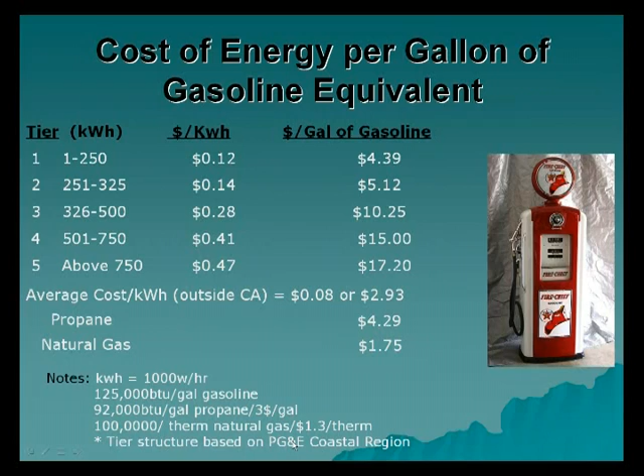Again, this tier structure is based on the PG&E coastal region, and these prices were published in the Chronicle on Sunday. Okay, so just briefly, we'll touch on reduction.

With the foam insulations and the insulation verifications we're seeing, and the fact the Energy Code requires more insulation, we're seeing a lot less heat loss and heat gain due to conduction through your walls, floors, and ceiling. The new window products are just amazing. The Energy Star windows, which most manufacturers now offer at no additional cost, have a U value of 0.3 and an SHGC of 0.3. So those numbers are just about twice as good as what you would probably buy even 7, 8 years ago. The numbers are just outstanding.

Also, starting in 2010, we now have a requirement in California to have fresh air. The thought is the homes have gotten so tight that in order to provide proper indoor air quality, we now have to have either air-to-air heat exchangers or some way to bring fresh air in. And this is something that's now required.

This device here in the upper left-hand corner is an air-to-air heat exchanger. It takes the warm indoor air, blows it through a heat exchanger, and then takes fresh outdoor air, which is cooler, at least in the wintertime, blows it over the heat exchanger and then into the house. So you not only get a supply of fresh air to ensure proper indoor air quality, but it doesn't have to be conditioned as much.

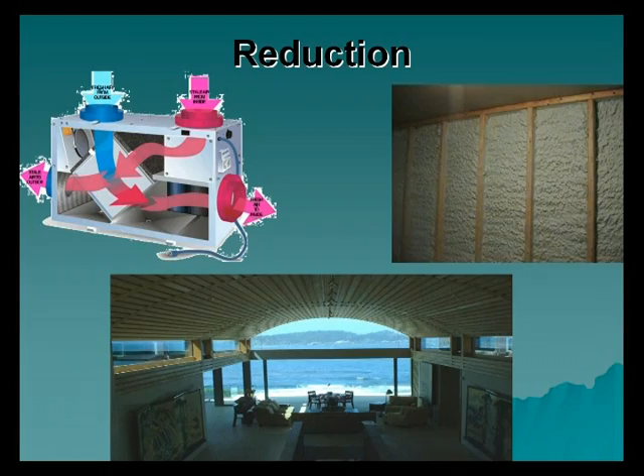Okay, I mentioned the increases in the lighting efficiencies. With a standard incandescent light, 1 watt will produce 15 lumens. For the same number of watts, you get 60 lumens with a compact fluorescent, and the LED lighting is evolving quite quickly. The numbers right now come out about the same as compact fluorescents.

Philips has announced a product that is 110 lumens per watt that's supposed to be on the market in early 2010. But anyway, you can just see the effect of having what's known as high-efficacy lighting on sizing of a PV system. It's at least a 4-to-1 difference, and lighting is not insignificant when it comes to your total energy use.

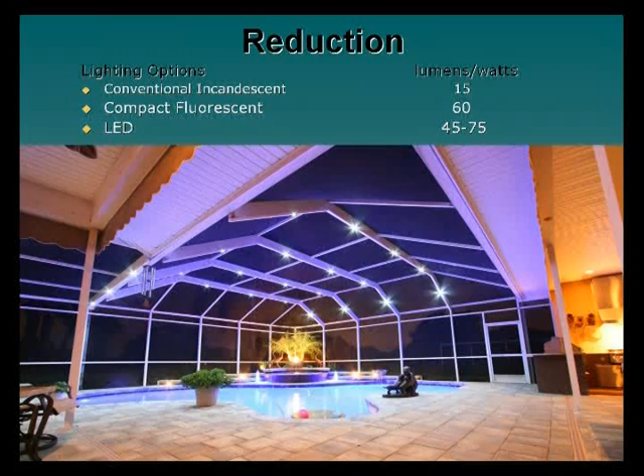Appliances is even a better story. 80% of the appliances sold in California are Energy Star. A standard refrigerator, this is a 28 cubic foot refrigerator. The standard uses 727 kilowatt hours per year. 10 years ago, this same refrigerator would probably be 1,700 kilowatt hours per year.

You buy an Energy Star, which, by the way, doesn't really cost any more, and like I mentioned, 80% of the appliances sold in California are Energy Star, 577 kilowatt hours per year. It's the same for dishwashers, washers, TVs. The numbers just come out great. And again, it doesn't affect the lifestyle of the homeowner or the design of the house with these reductions.

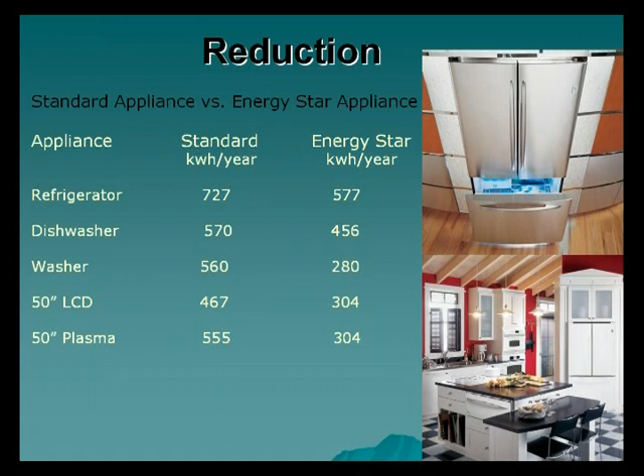And I mentioned verification. With the new energy code, not every house will have to have a blower door test to test the infiltration levels and to meet certain infiltration levels. And not every house will have to have a duct blaster test to test the duct efficiency. But I'm saying most will. With the new energy code, it's so hard to get things to comply.

They assume you're already putting in lots of insulation in the walls, floors, and ceilings. They assume you're already putting in basically Energy Star windows. They're assuming you're already putting in a very efficient HVAC system. There's not much left that the energy consultant can take credit for besides HERS inspections and some solar thermal for domestic hot water. Beyond that, there's just not much else you can do.

And the great thing about grid-tied solar electric systems for new homes is every system has to be verified for its production. We'll explain that later, but you don't get the rebates unless the inspections are done to make sure that it's not in the shade and it's installed properly and it's producing the proper amount of energy.

Okay, I'm going to talk about this later, but I just want to throw this out here now: in a net zero energy house, you have different options for using electricity for space heating. Standard unitary heat pumps, geo-exchange heat pumps. General Electric just came out with a nice heat pump water heater. There's your Mr. Slim type ductless heat pumps that are made by a bunch of different manufacturers. And what's new are the air-to-water heat pumps, some of the European and Asian products that are unbelievably efficient. And we'll talk about all that in just a second.

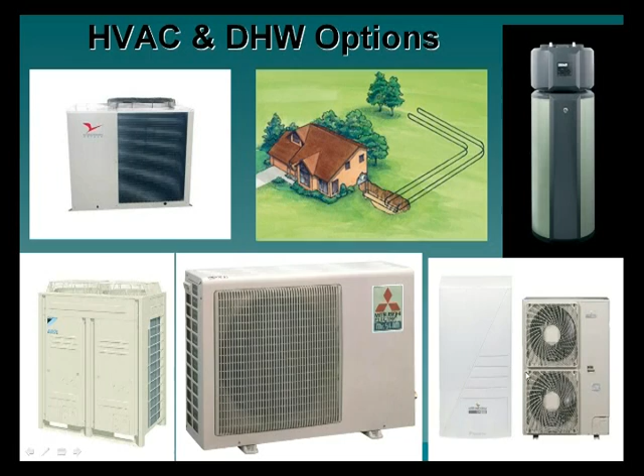Okay, so we've gone through the house, and the simple thing again is the conservation. Chances are it's already being done. What we do then to calculate how to achieve net zero energy is we take the exact floor plan for that home builder, and we have a list of assumptions that we made based on lots and lots of research through the Department of Energy, et cetera, on how much energy a house or a room in a house will use based on the square footage. So we take the floor plan and we download it, and then we run a series of equations based on the square footage of each type of room.

And what we then develop is a total of the kilowatt hours that are being used for the lights and appliances for that house. We then give it back to the homeowner and say, look, here are the assumptions we made. You know, we assume you watch 4 hours of TV and play with the computer 2 hours a day and blah, blah, blah. Please tell us what your real average is. And they give it back to us. And the results have been great.

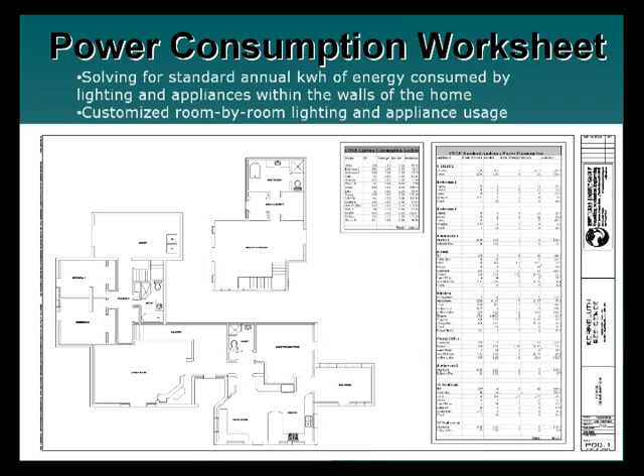We've done about 100 projects this way, and we feel very comfortable with our numbers because, unfortunately, a lot of those homes had been burned down. So the people had a historical record on a similar house, or the homeowners were building a house similar to the one they just moved out of. It's the same family, just moving a few blocks away and building a new house. So we feel pretty comfortable that we're close, but we like to have the occupant go through and see where they think the numbers are going to vary.

The previous slide was for our standard lights and appliances inside the walls of the building. And then we do what we call our non-standard electrical worksheet. These are things that are either outside the walls of the building, like swimming pool pumps, well pumps, exterior lighting, hobby use of who knows what. And also within the house, things like the guy running his business out of his house with a server and 3 computers, or a kid that plays video games 12 hours a day, or a reef fish